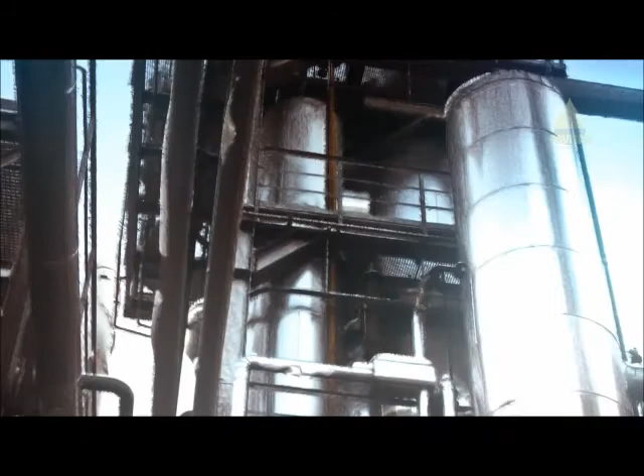Let us represent the innovative service company Kavitar, that is the right holder and developer of the revolutionary technology of low-temperature cracking, which allows to increase the quality depth of oil processing up to 90%. According to the data of the International Patent Search, our technology has no analogues in the world, and it is different from existing technological cycles, where the increase of processing depth is based on secondary processes and an extraction of light fractions from the obtained black oil.

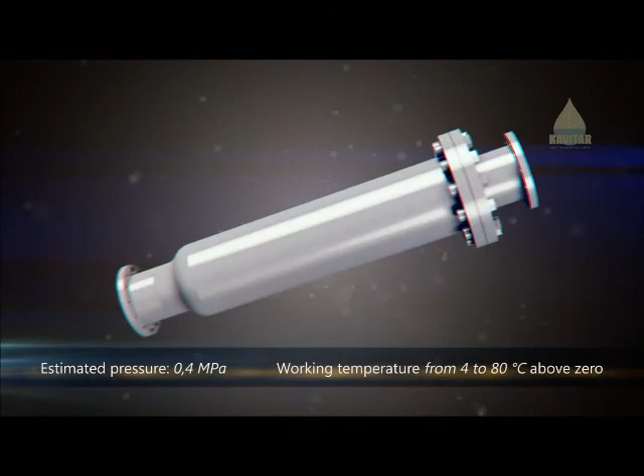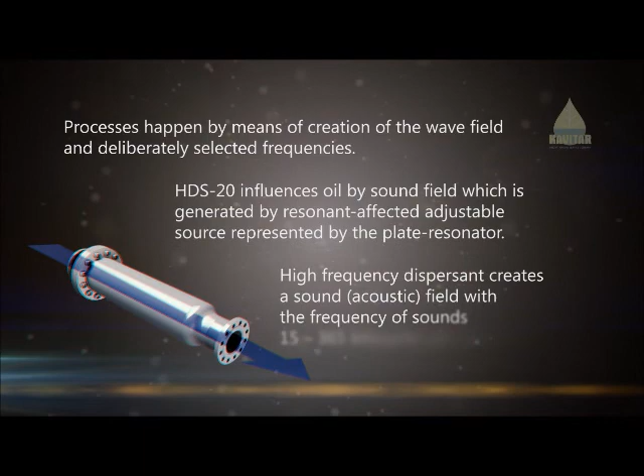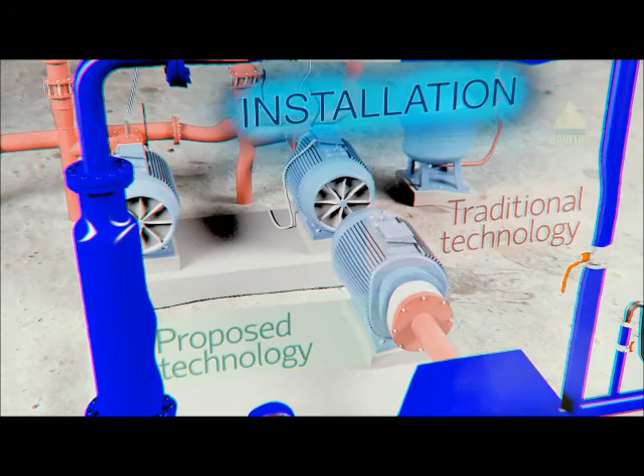Proposed technology allows to exclude, partially or completely, secondary processes of oil processing, such as thermal cracking, catalytic and hydrocracking, as well as to improve ecological characteristics of the production radically. We chose the way of influence on primary processes, directly on commercial oil. There is a great combination of wave, hydrodynamic and cavitation processes which happen at the molecular level in this device, called hydrodynamic dispersant number 20 by Saletov. All these processes help to improve the oil structure at low temperatures.

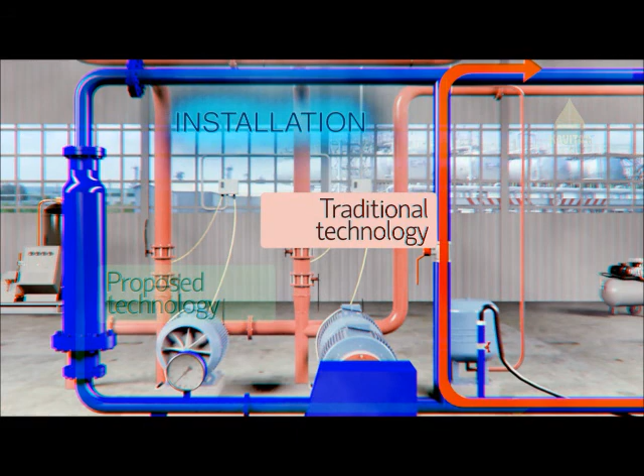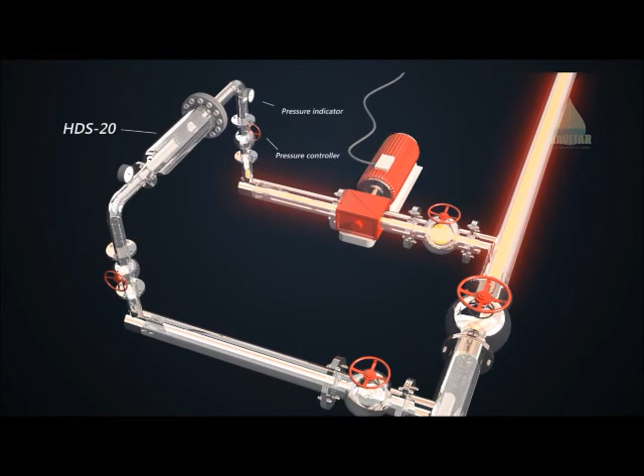Our technology is aimed at considerable decrease of cost value and power inputs in the process of refined oil production, improvement of its quality characteristics, short terms of implementation and fast payback. As an object for calculations, a relative oil refinery was taken. Its output is 5,500,000 tons per year. It works according to traditional technology. The depth of processing is from 55 to 60%. Let's take a look at two ways of mineral oil processing, traditional one and the way proposed by us, according to innovative technology, hydrodynamic dispersant number 20 by Saletov.

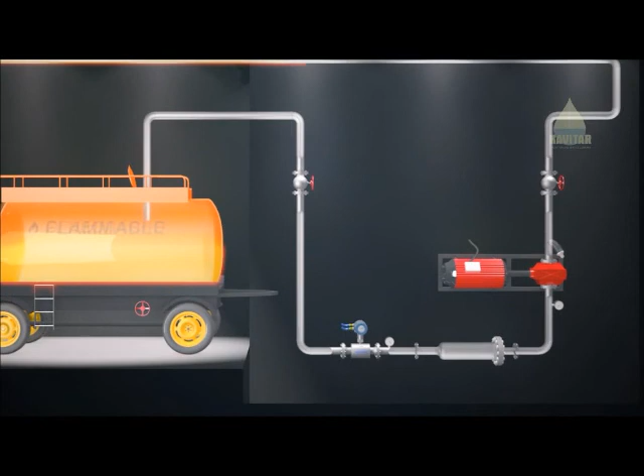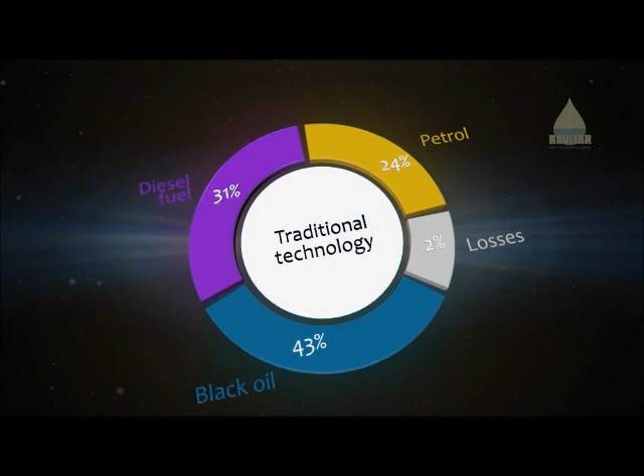After implementation of hydrodynamic dispersant number 20 by Saletov, petrol 36%, diesel fuel 54%, black oil 8%, part of the production loss 2%. The process of changing in oil fractional composition is achieved by means of creation of internal pressure up to 4 atmospheres, with the help of intentionally installed pumps, while usage of hydrodynamic flow and wave field of the special configuration and frequency. Safe work of hydrodynamic dispersant number 20 by Saletov without additional costs for the maintenance is guaranteed. After implementation of this oil preparation technology, the amount of black mineral oil is really decreased. Their part is taken by petrol and diesel fuel.

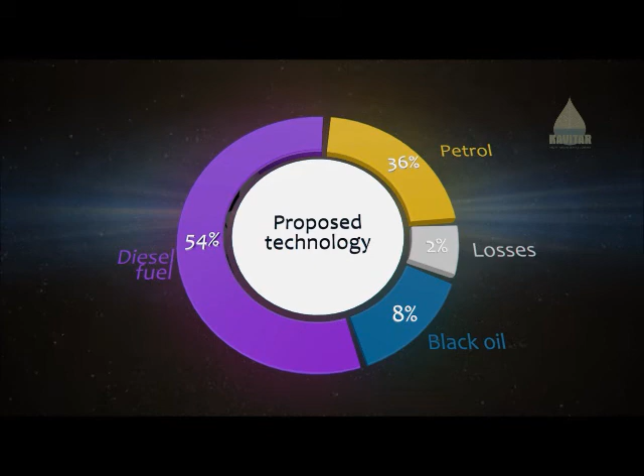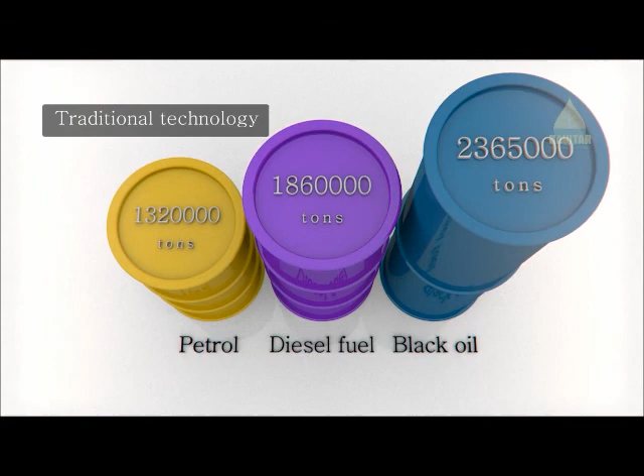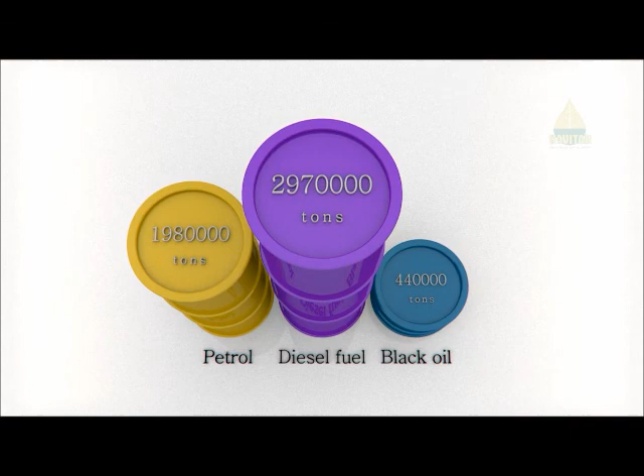Transfer of the oil refinery to the proposed technology of oil preparation happens step by step, 25% of facilities at every quarter of the year during the project realization. It's necessary for approbation of the technology, and it doesn't demand single-step modernization of the whole production. Implementation of the proposed technology really improves financial characteristics of the plant. At the first year of the project realization, sales revenue is increased at 18% in connection with the step-by-step implementation of the technology. At the second and the following years, the increase is 29% in comparison with the current technology. Revenue can reach more than approximately $4,255,000 per year. Net income after repayment of all excise taxes and taxes is increased at $583,000 per year, starting with the second year of project realization.

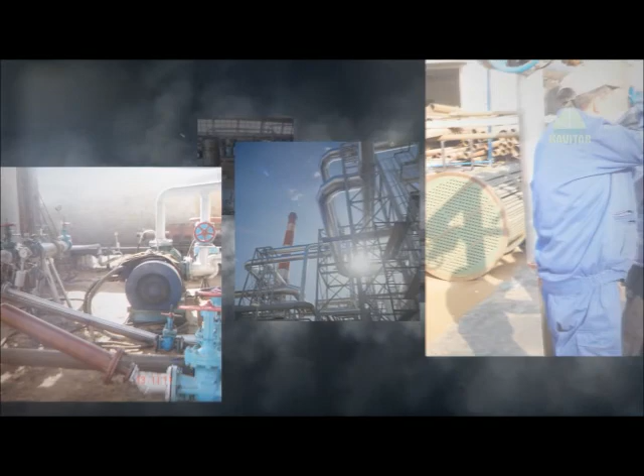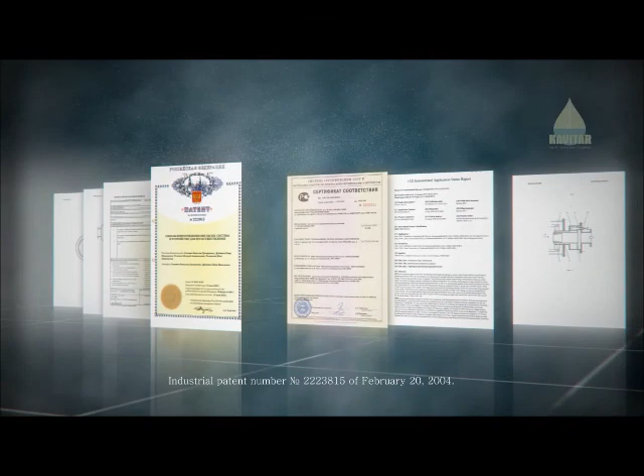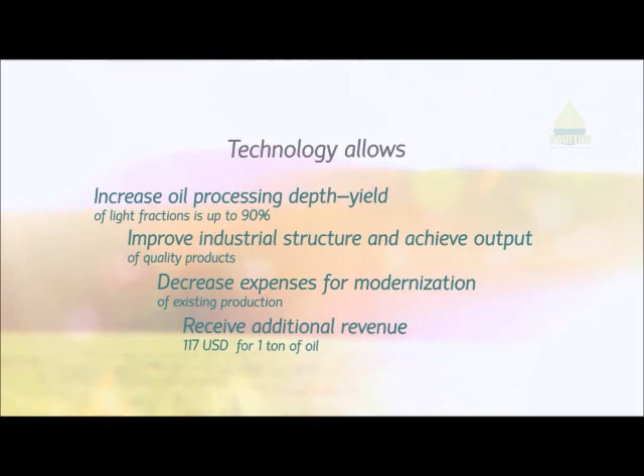Implementation of the proposed innovative technology doesn't have any negative influence on the environment. Innovative service company Kavitar possesses all necessary documents which confirm the safety of technology implementation for environment and production. Hydrodynamic dispersant number 20 by Saletov is protected by the Eurasian and European Industrial Patent. Hydrodynamic dispersant number 20 by Saletov is not designated for sale. It is given to the client for rent for the whole period of exploitation after the sub-license contract is signed by the parties.